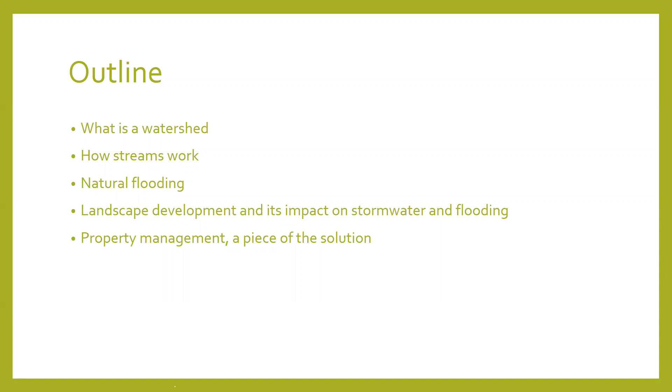There's an enormous amount of information that we can include under this headline. I want to call out that this is not a one-stop shop presentation, but an introduction. Streams, stormwater, and flooding are complicated. My goal is for you to get to know the basics, for you to observe things, and for you to think about how you manage your own properties and help others understand this stuff.

So this is very much a presentation focused on increasing understanding of the natural world, changes made to the natural world, and what we can do where we live. We are not talking about the big stuff today, like regulatory rules, large developments, addressing sewer systems, or zoning and ordinances.

So here's the journey we're about to go on together. The big idea is that we all live in a watershed, that streams are part of a watershed, that there is a natural system in place, and that people have changed that natural system.

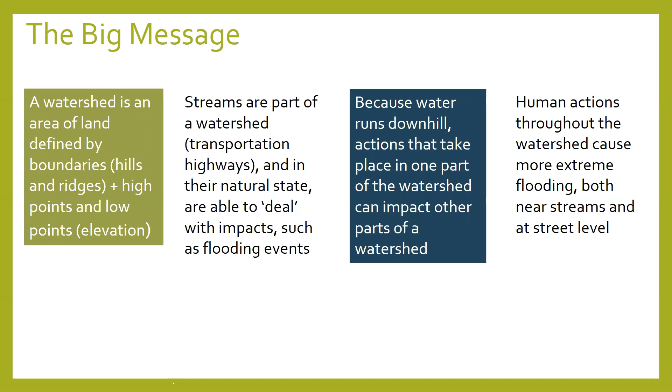What is a watershed? A watershed is an area of land defined by hills, ridges, and elevation. Watersheds contain everything within it: land, streams, trees, soil, your house, the grocery store, everything. And water flows downhill. So all of the rain and streams within the watershed will flow from high point to low point until draining at a common lowest point. When you hear shed, think shedding water. Watersheds are also called drainage basins because water drains downhill within its boundary, the basin.

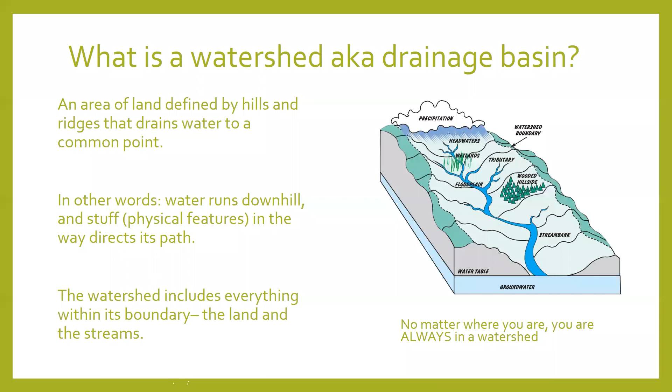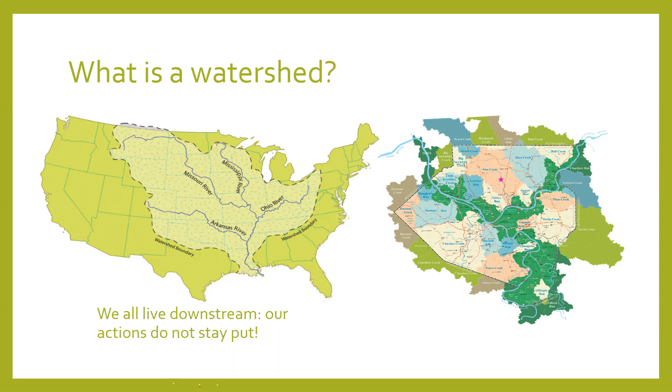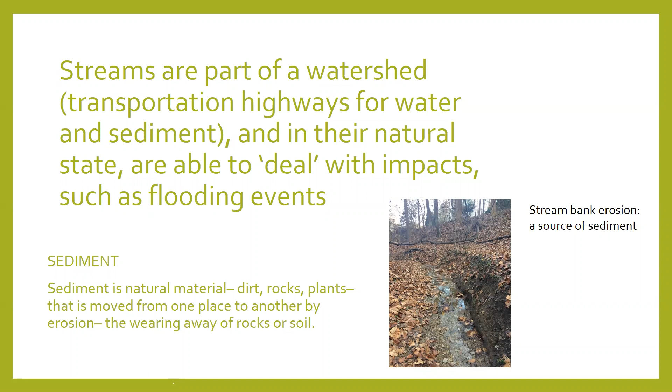A natural stream has some curves, or technical term meanders, which help to slow down flow. Think of driving on a highway or the turnpike versus driving on a winding road. You can really cut loose on straight roads, and not just because of the speed limit. Those straightaways physically allow a vehicle to move faster, whereas a winding road forces you to slow down because otherwise you can run off the road.

In addition to having meanders, streams have floodplains. A stream channel is formed by normal flows and normal precipitation. The floodplain is formed by intense flows and heavy storms. Floodplains are called floodplains because that's what they do. They flood. Streams have floodplains because streams are supposed to flood. For a stream, flooding is natural.

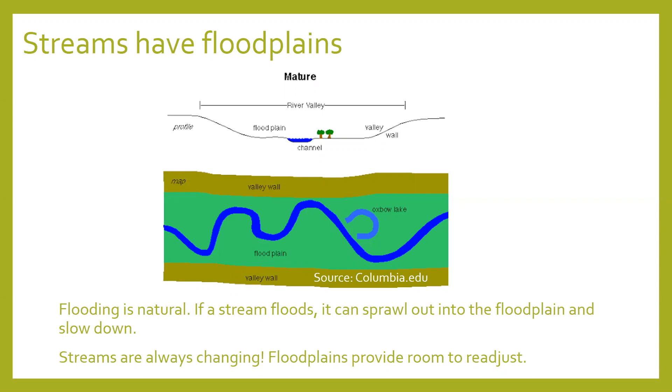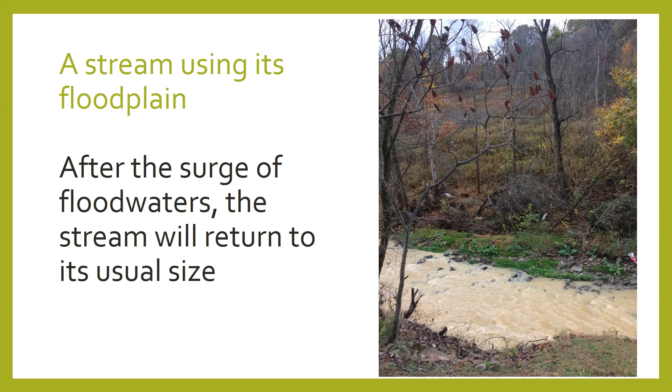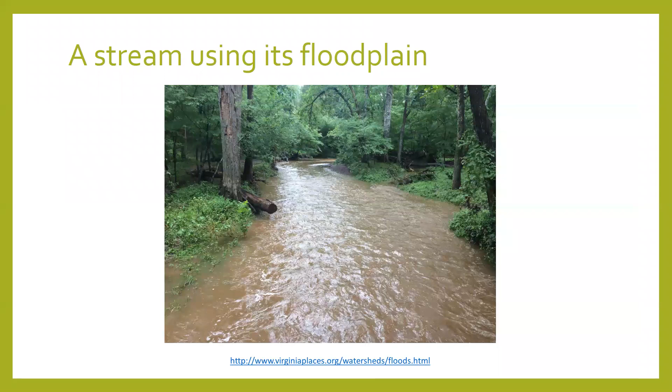Another important part of natural streams are the trees, shrubs, and grasses that grow beside them. There are so many valuable services that riparian buffers provide, one of which is slowing floodwaters and the strengthening of stream banks, which reduces erosion. Buffers provide protection both ways, by slowing and absorbing water running off the land, and by helping to do the same thing from within the stream itself.

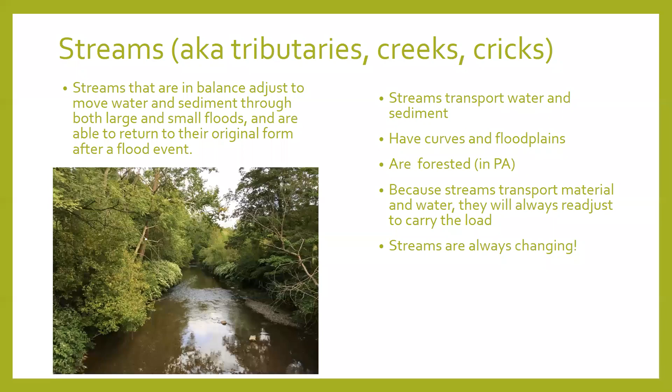Okay, so we've covered a bit of the basics of watersheds and natural streams. Let's now add us humans into this. Enter stormwater. Stormwater is exactly what it sounds like if you're unfamiliar. It is water that starts as rain or snow, and any water that does not get absorbed becomes runoff. In this photo, you can see water is running off the driveway and sidewalk into the street, into the sewer system. There's also water coming into the storm drain from up the street. Through the sewers, runoff will reach a stream or river.

There has always been stormwater, even before people got involved. There is stormwater from forests and fields, too. The increase in stormwater is the result of changing our green spaces to gray spaces, now coupled with the increase in precipitation this region is experiencing and will continue to experience.

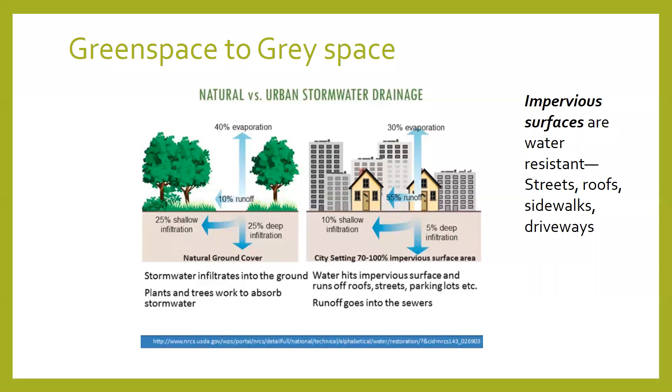It's raining, minutes have passed, and you still haven't felt a drop of rain on your skin. The rain is falling on a huge canopy of leaves. Some of the rain will drip to the ground, which will then absorb it.

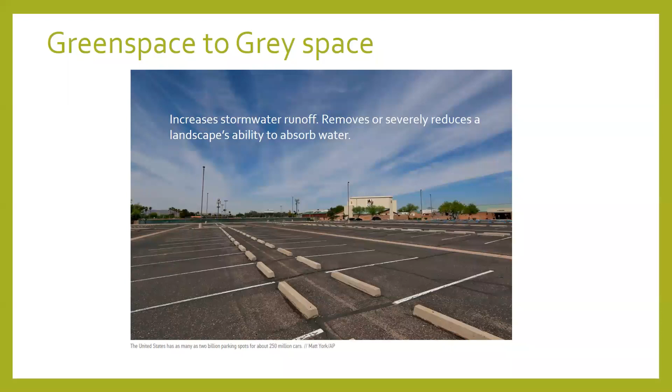The stormwater runoff that makes its way to the storm drain enters the sewer system, which will eventually outlet to a stream or river. There are two types of storm sewer systems, combined and separated. Older cities and municipalities, like the city of Pittsburgh, are likely to have a combined system, while newer communities have separate systems. Combined means that one pipe will carry both the water from your home and the stormwater runoff outside to a water treatment plant.

For people living in a combined sewer community, they should think about when they're running the dishwasher, taking a shower, and doing laundry during a rain event, because all of that water is going to the same system as the rain running off their roof, their driveway, the street. If you're familiar with the headlines of raw sewage flowing into the rivers, this is how it happens. A sewer system that is not sized for all of that water has to dump somewhere, and that somewhere is the rivers.

For separated systems, the pipes inside your home lead to a water treatment plant, while the sewer lines in the street are carrying just the stormwater runoff to streams or rivers. Whether separate or combined, sewer systems can get overwhelmed by flows. There's just not enough space. The storm drain inlets can also get clogged with debris like litter, sediment, and leaves.

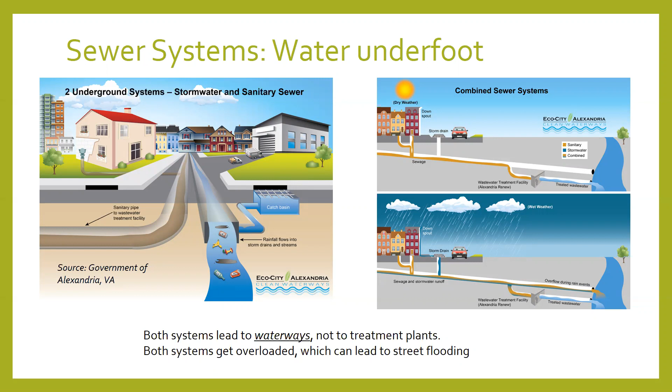For a developed watershed during a rain, the solid line, rain immediately runs off parking lots and roofs and quickly runs into the stream. This intense peak in runoff causes flooding and erosive forces that overwhelm streams. The stream level quickly falls after the rain has stopped. Some of you might be familiar with the term or personally experienced flash flooding. Keep in mind too that the Pittsburgh area is very hilly. Runoff is really able to pick up speed as it's running off those hills and steep slopes.

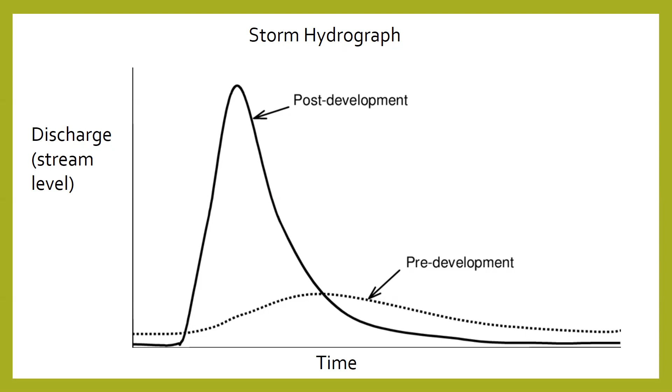Okay, remember the healthy stream qualities? Space to wind around, a floodplain, forested. We have made changes to our streams to make way for building roads, houses, and businesses. Eliminating or restricting the floodplain and vegetation, channelizing the stream, which turns streams into speedways, combined with the intake of stormwater, both from directly running off the land and from the sewer outlet pipes, overwhelm streams.

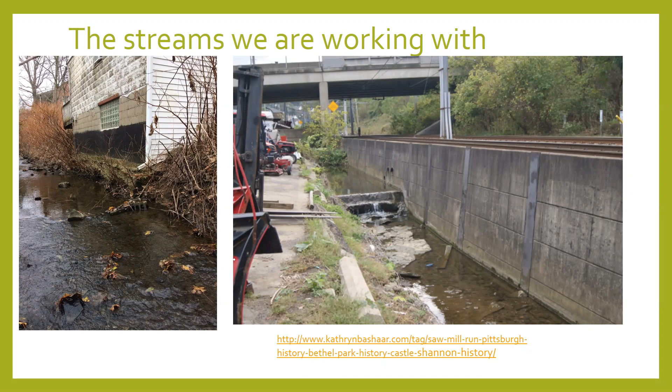And just like storm drain inlets getting clogged by debris, streams can also get jammed up with things like trees, branches, sediment, tires, which also causes flooding. More examples of Allegheny County streams that had their best qualities removed: straightened, no space to roam, no trees, shrubs, or grasses to help slow down incoming flow, no elbow room.

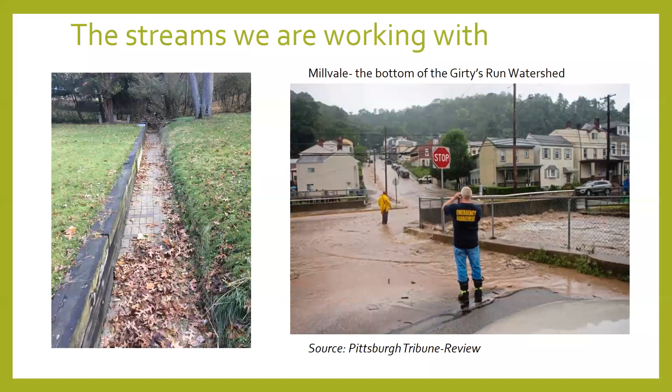Those examples of unnatural streams are extreme. You may not have any streams where you live where stream banks have been exchanged for artificial walls. Here's the type of stream you might have around your turf. Doesn't look too bad. There's a floodplain, I'm seeing some curves, there's at least some vegetation.

But what about all the water that's coming downstream during a rain event from all the communities above it? What about all the storm water rolling off the roads right past those grassy hillsides? No trees or shrubs to help slow runoff, hold the banks in place, catch sediment from upstream. While there is a floodplain, it's squeezed by roads. If flows do not have enough room, that channel will fill up and spill out onto the street.

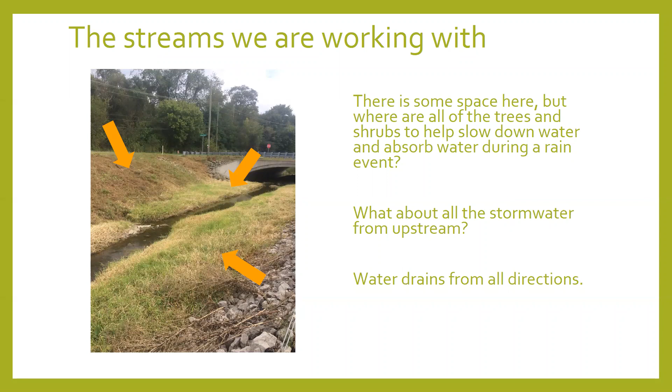Don't forget the watershed. The upstream development, lack of riparian buffers, and squeezed floodplains leads to consequences downstream. As you can see, the downstream photo seems to have all the right stuff. It's located in a forest and there's room for a floodplain. However, the amount of water that routinely flows from the development upstream is blasting through and eroding that stream bank in a forest.

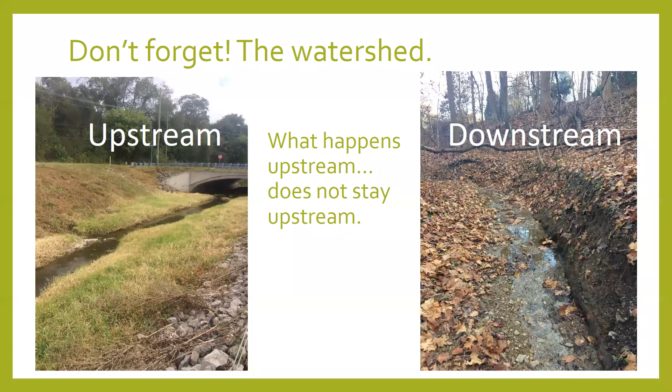Another stream that does not look so bad at first glance. Again, there's a floodplain, there's some trees, the stream is allowed to express itself, but just like the stream in the previous slide, there is water coming from every direction, from upstream, from off the road, from the outlet pipe carrying stormwater from the street. What if instead of a neatly mowed property, the stream had forested banks to slow down the rain from all directions?

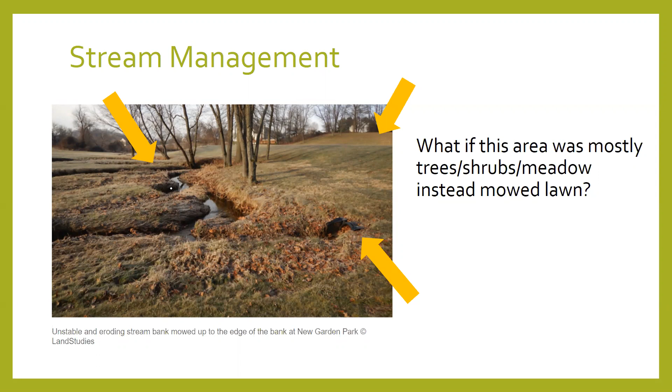Don't forget the watershed. This stream doesn't look too bad on its own, but it does not exist on its own. It's part of a system, the watershed. The upstream development, lack of riparian buffers, and squeezed floodplains leads to consequences downstream.

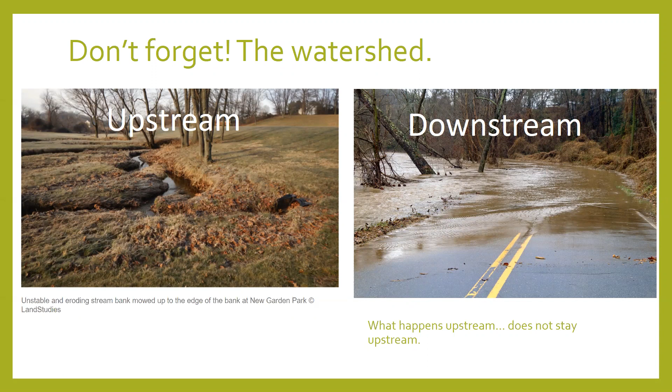Streams can't handle it. Just like the undersized sewer pipes, they are not equipped to take on both the amount and rate of stormwater runoff. This portion of the stream in the photo begins at the top of the hill of a neighborhood. It goes into a pipe, then opens up as a stream again, where it is surrounded by a paved path and mowed lawn, then enters this channel, and then outlets here back in the outlet to go back underground. As you can see, the stream channel is blown out and the stream outlet structure is completely jammed. Too much water, too much fast water.

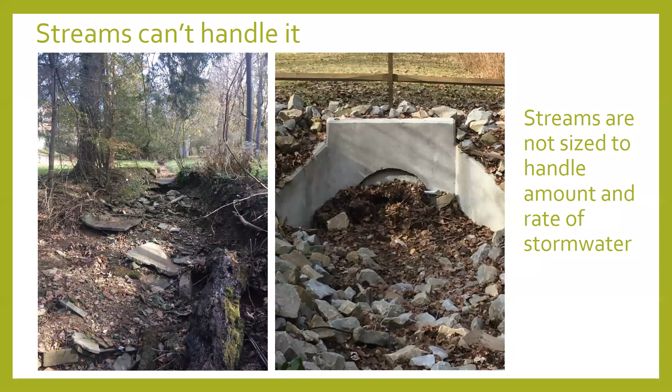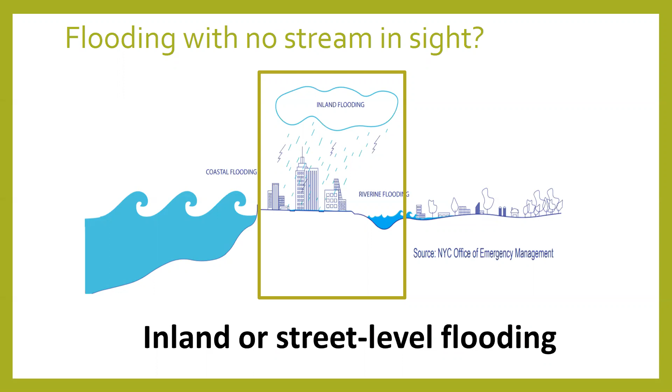What about the flooding that happens in your neighborhood that is nowhere near a stream? This is called street level flooding. Notice on the diagram that this type of flooding occurs in developed landscapes. This slide is a bit of a review. We've gone from green to gray, and when there's a lot of rain with nowhere to go and/or the sewer system is at max capacity, we get flooding in the streets and in homes.

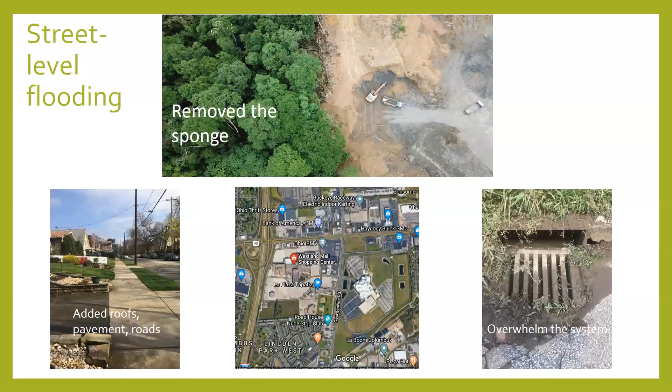Have you seen storm drain inlets that look like this? Clogged and unable to accept water from the street. During intense storms, lawn debris and trash plug this infrastructure and cause localized flooding. Again, with the photo on the right, the amount and rate of stormwater entering a storm sewer system can overwhelm the available space, causing street level flooding.

Street level flooding can also be home level flooding. Low-lying areas like the perimeter of a building leading into basements get overwhelmed with runoff with nowhere to go. Sewer backups from runoff overload can also cause basement flooding.

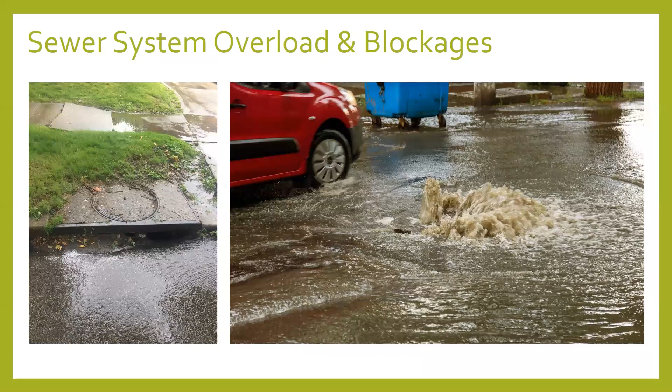Now begins the part of the presentation where you as a property owner or someone who knows a property owner comes in. Streamside property owners can plant riparian buffers, which again is the strip of native trees and shrubs that lines along the banks. So for those of us that do not have waterfront property, there are a few things to know and think about. We love neatly mowed lawns, but we need to think about them differently. If you want to help decrease downstream runoff, consider your lawn. Grass, while obviously not pavement and offers some benefits, is limited in slowing and storing stormwater runoff.

Check out the roots on the grass furthest to the left. Turf grass does not pull its weight when it comes to helping to slow and absorb runoff. Neatly mowed lawns don't absorb much water compared to native trees, shrubs, and plants. Deep roots create space for water storage, and taller plants have more surface area, which means that their surfaces can act as temporary storage space. Vegetation also provides evapotranspiration services. Again, that water can evaporate into the air from the plant itself, which reduces even more runoff.

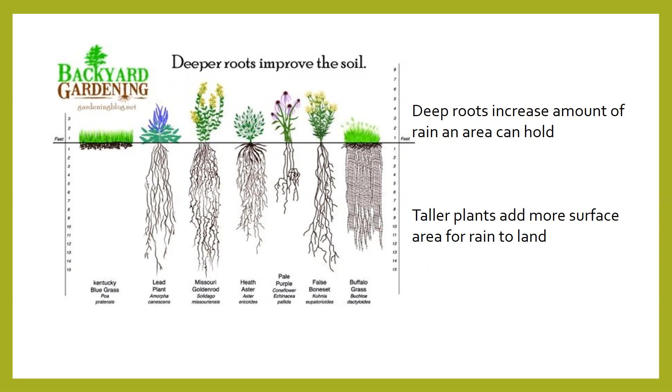A single yard of all neatly mowed grass, not a big deal. All of the yards on the street, all of the lawns in the neighborhood, all of the lawns in the watershed, all of these add up. We're not digging into solutions in this, but an internet search of stormwater friendly yards will bring up thousands of hits. It's like adjusting the height on your mower to not cut the grasses short, change portions of a lawn to meadows, plant trees, install rain gardens, and so forth.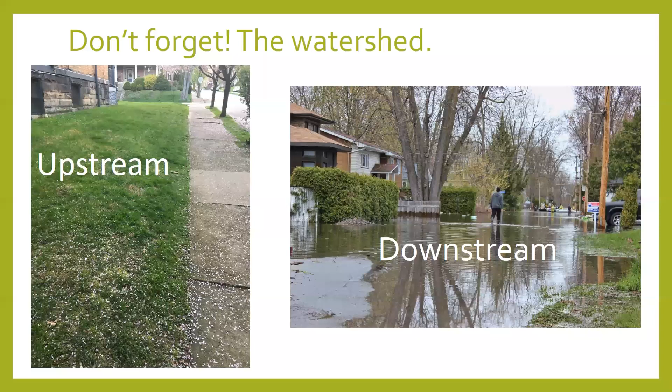Why does it flood? Because it's supposed to. But we have changed our landscape and our streams, which causes harms to people and properties. It is raining more, and it is projected to continue that pattern well into the future.

Well, you have homework if you haven't already done these things. Watch where the rain goes on your property, in your neighborhood, in the park. Think about what could be different. More trees, more shrubs, taller grasses, rain gardens. Think about the streams. Do they have space to roam? Are they vegetated? Is there space for floodwaters? If you don't already know, what watershed do you live in and what other zip codes are in your watershed? Not a property owner? Tell a friend or family member who is a property owner about what you learned today.

As I mentioned at the beginning of this presentation, there are some really big problems to tackle to address stormwater flooding. But because everyone lives in a watershed, everyone can help to reduce stormwater and flooding. If every property owner made some changes, there would be a reduction in stormwater. This is not the solution, this is part of the solution.